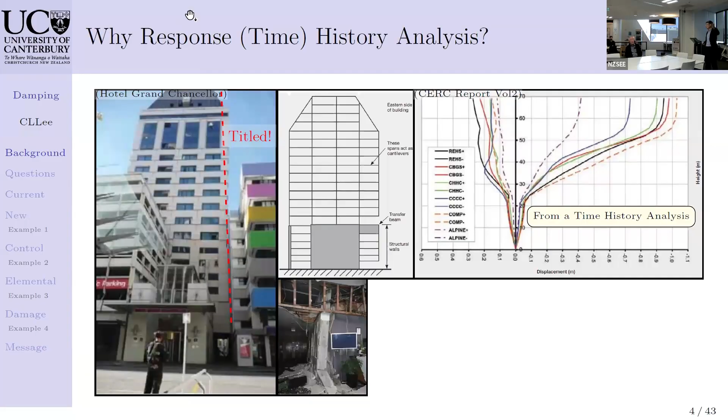Because this structure is actually non-symmetric, non-regular, this ratcheting effect cannot be easily captured by using a modal response spectrum analysis. That means a response history analysis is warranted, for evaluating the performance or capacity of the building.

So I hope with this example, I can give you sufficient reasons why we need to worry about time history analysis. I understand usually this is considered a time-consuming process in the design office. But there's another good example which Ethel has published in a recent paper in the bulletin of NZSEE. If you have dampers installed, again, modal response spectrum analysis is not applicable, because the modes can no longer be uncoupled. So that justifies the need for response history analysis, or sometimes called time history analysis.

I'm going to show you some equations, but I promise I only show two equations, and this is the first one. I believe most of you have seen it before. This is the equation of motion. We have three terms there that resist: you can treat them as inertial force, damping force, and the structure resisting force that's derived usually based on material hysteresis. The right side is the equivalent forces due to earthquakes.

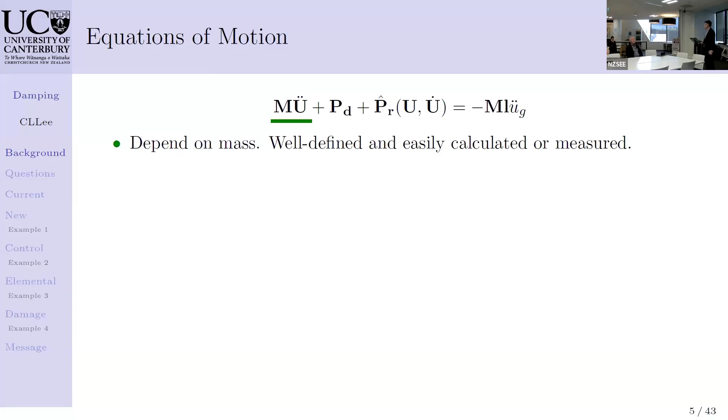So let's examine the first term, which is the inertial force. Inertial force, obviously, is a very intuitive term that basically says there's a mass, the mass accelerates, so they induce forces. That depends on mass, and we can always quantify them rather easily through measurements. We can roughly give an estimate on what would be the weight or mass in the buildings.

Of course, including all the non-structural components, we could have a good handle on it. The third term depends on the material properties. For nonlinear structures, we always see the stiffness changes with displacement. And usually it's well defined through lab measurements. We could measure the stress-strain relationship, or we can test something in the lab.

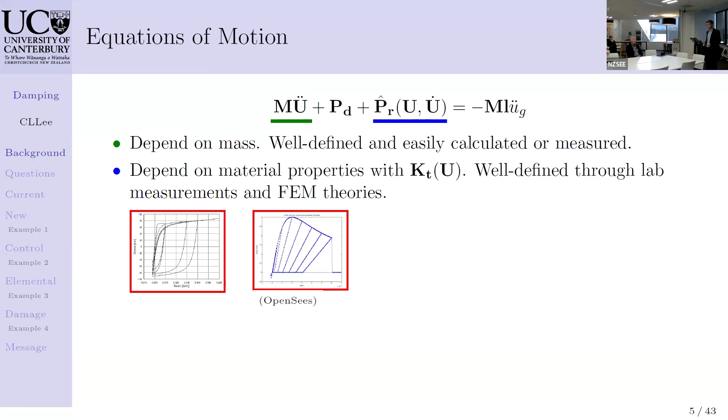We have a good handle on it. And based on FEM theory, the finite element methods theory, we could kind of set up a structural model for that. Say if we can set up a stress-strain curve of steel material, concrete material, based on FEM theory, we know roughly how we can approximate the columns, using different approximation theories, whether detailed solid finite elements or some kind of simplified concentrated plastic hinge element, or somewhere in between. It depends on the level of accuracy that you want to pursue, but definitely you have a good handle of it.

You have a damper. Let me remind you again, we have a damper. Damper actually belongs to this term. That's why you may notice that I said the third term is not k times u, but rather it's a function of u, but could be a function of velocity as well. The viscous damper, we know how to quantify that behavior, so we should actually model it explicitly. In that sense, we are not trying to approximate using any modal analysis. We have a good understanding about that. And then we can allow modal coupling. So no problem with that.

But how about the middle term, the damping force term? What is it for? How to quantify it?

Well, that's blocking the title, but if you can help me kind of hide that if possible. Don't worry about it if it's not possible.

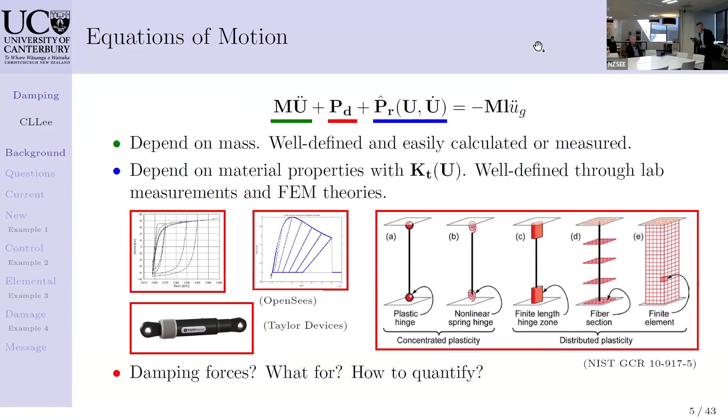It's okay. Don't worry about it.

So the damping force PD, we usually use it to model so-called unmodeled energy dissipation. What is it called unmodeled? That means for those energy dissipation in steel, concrete, timber, or any other quantified viscous damper, we could actually lump it into the PR term. But those that cannot be measured or quantified easily, we lump into this PD term. It's called unmodeled because this term is used in some documents by ATC and PEER. I kind of like it because it emphasizes that this is something you've missed in your material models. So you're trying to capture something you have missed.

So what are these kinds of energy dissipation mechanisms? It could come from micro-cracking and micro-yielding in structural members. We know that concrete always cracks - you always see some micro-cracks happening here and there. Even for steel, you also see some micro-yielding because of some inclusion or imperfection in the steel material. These are things we cannot easily quantify.

When we try to understand structures, we set up models, and we can't afford to have the exact nonlinear material stress-strain curve everywhere in the building. That is just too much. Think about a building with lots of material points - trying to capture every single inelastic thing is just too costly to do. So that means for some components, we see that inelastic deformation is going to be very little, so might as well just treat them as elastic. That's a kind of common practice.

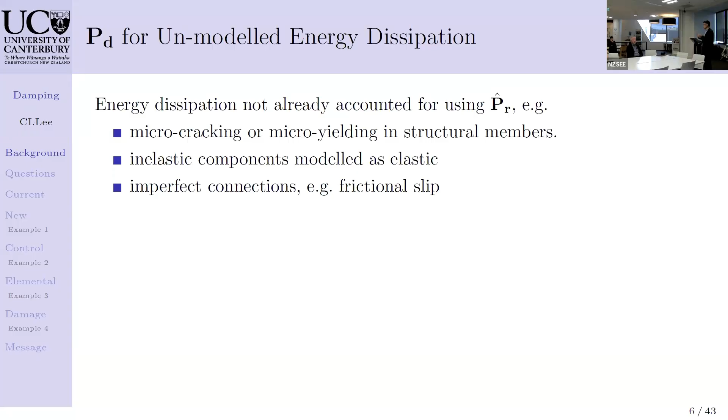Some imperfect connections - in theory, in our minds, they are perfect, and in our computer model they are also perfect. But we know nothing is perfect. All the connections that we have, sometimes you will see some slip happening, right? When you load it, because of insufficient turn of the nuts, it just could slip. So this could induce some energy dissipation as well.

And there's some interaction between structural components and non-structural components. Probably one of the major ones is that buildings never sit on a fixed base - they sit on ground, and ground could move. When any vibration happens from buildings, there will be some radiation damping between the foundation structure and the surrounding soil. Those damping effects could be quite significant. But usually in our practice, we try to model the structure as fixed base. In that sense, we miss that, and if we miss that, we have to account for it. How do we account for it? It could be in this PD term. Of course, not ideal, but there could be something there.

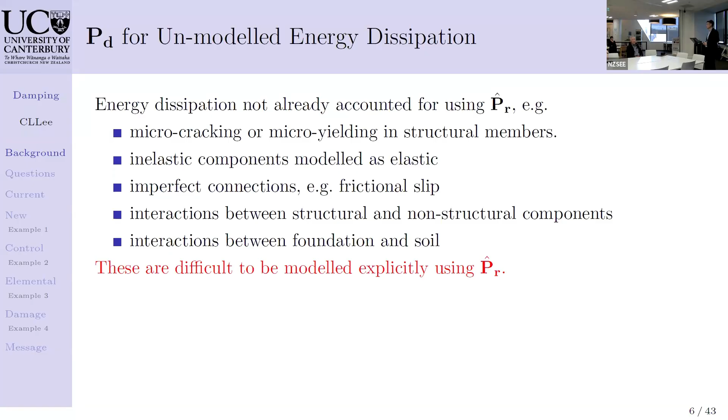These are difficult to be modeled explicitly using PR - that's why we use PD. So you might ask, since we want to model PD, how do we model it? I think the most intuitive one is viscous damping, right? Why viscous damping, which equals C matrix times velocity, U dot? Why is it that we like that? Because it's mathematically convenient and well understood.

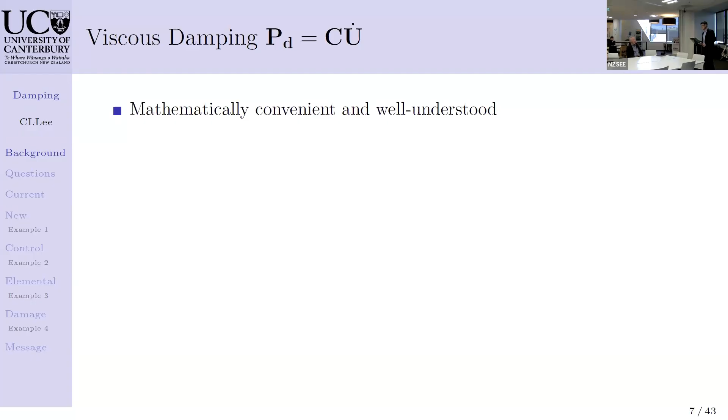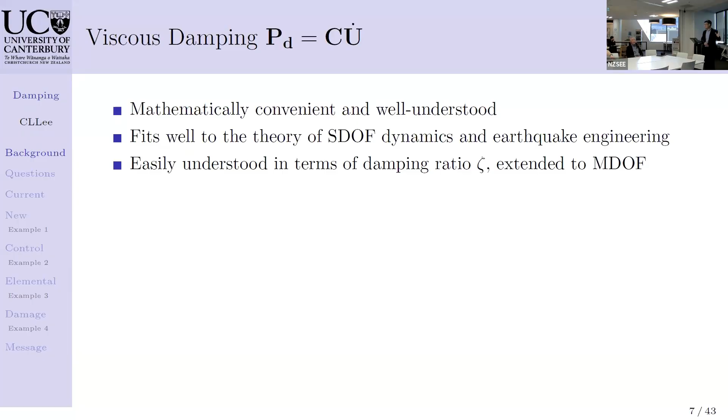Particularly when we learn about dynamics, we always start with a single degree of freedom system, and viscous damping is the one we learn. So it fits well with single degree of freedom dynamics. Also in earthquake engineering practice, we talk about damping all the time, so that's something we're familiar with. It's easily understood in terms of damping ratio, for one degree of freedom and the same for multiple degrees of freedom. We can talk about modal damping ratio - mode 1, mode 2, mode 3, mode 4 damping ratio. That's an easy way to quantify energy dissipation.

And recently, 30 years later, as people got more and more data, they also noticed that mode 1 damping sometimes depends on building height - the taller the building, probably the smaller the damping. I think it makes some sense because the soil part, the radiation damping part, could be less significant when the building is tall.

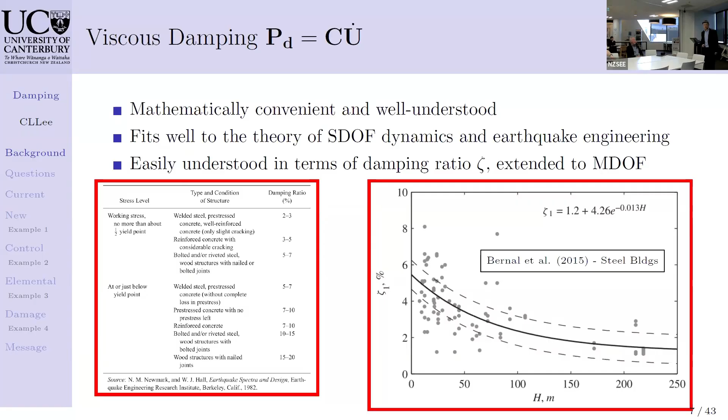Okay, now we understand that viscous damping is probably good enough, hopefully. And then now, as modelers, or as engineers, you might ask some questions. Let me think about what could be the question that we have in our mind.

The question for using the C matrix. So first question is, should we use a C that's proportional or non-proportional? And should modes be coupled? That's my first question. I hope some of you also have this question.

Second question: how do we assign damping ratio for all the modes? Now we know some data that gives us mode 1 damping ratio. But how about other modes? Do we assign the same damping ratio for all other modes or not?

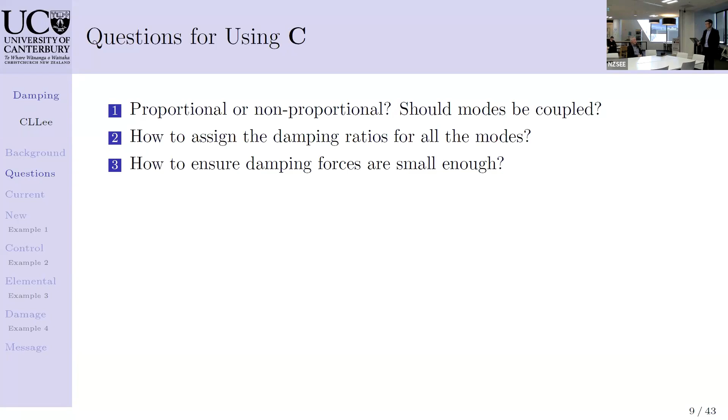And how do we ensure damping forces are small enough? I guess since Rayleigh's book on dynamics talks about, well, hopefully they are small. So we hope that all the major energy dissipation has been captured by the third term. That's why this second term, we hope, is small. Hopefully.

And if we have lots of degrees of freedom in structures, nowadays people like to model buildings with every single detail, 3-dimensional. So the number of degrees of freedom could be tens of thousands, nowadays you can afford that, or even millions, possible. So how can we ensure whatever C we use is fast enough to give me the solution? I can't sit there and wait for a year. I can afford to wait for one weekend, but not a year.

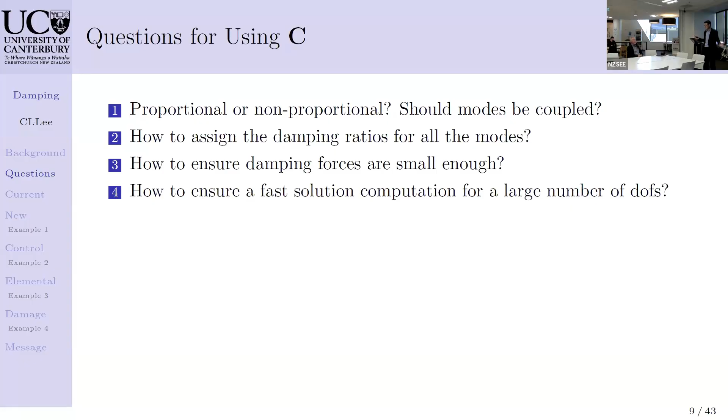And we know structures go into nonlinear range, the stiffness changes. Should we update C or not? If we don't update C, think about this second equation I'm going to show you: the damping ratio is equal to half of C divided by the square root of KT times M, where K is stiffness and M is mass. If the stiffness drops to, let's say, 1% of the initial, what will be the damping ratio if I don't change my C? It will be 10 times. If you originally assume 5% damping, it ends up 50% damping. Is it what you want?

And sometimes structures could go into a state of collapse. Maybe not collapse, but heavy P-delta effect leads to negative stiffness. How can I ensure that I have positive damping during softening response?

And we know structures are never homogeneous. We have structures of different parts. Some could be made of concrete, some could be made of steel. Probably for very tall buildings, people like to use hybrid structures, so there are concrete buildings in the lower floors and steel structures in the higher floors. And how about the foundation, or some basements? They have a lot of soils containing it. Is it right to assume the same damping throughout? But what if I don't want that? I just want to assign damping at different zones.

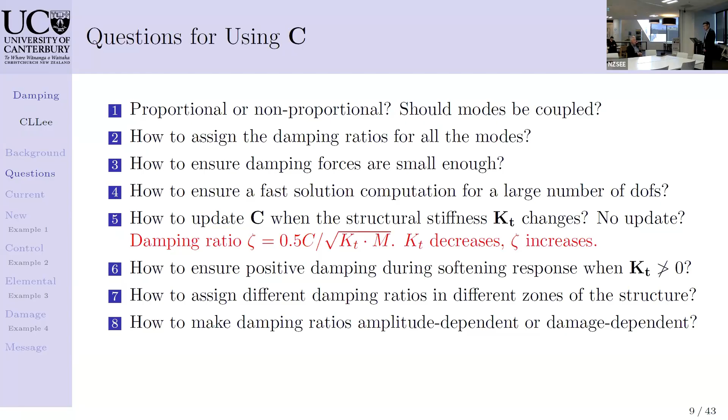And finally, I think this is the most important question from the users' perspective: can I get a C that I want? If I want to simulate the dynamic response of a structure, can I assign a C that I want in terms of damping ratio? In particular, sometimes we say 'I want,' but don't really mean I want — the code wants it, or some measured data requires that. How can I give a C that gives me that? Could I calibrate against measured data or calibrate against the code-required data?

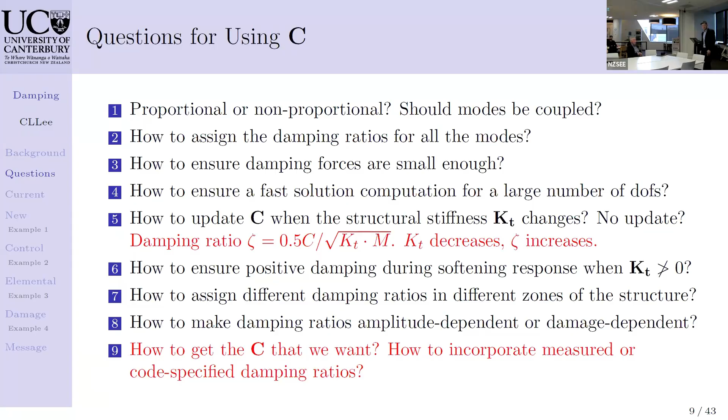So these are the questions that I have when I work on this. Let's see how — I hope that I can go through that slowly. Hope that question can stay with you a bit. So later in the following discussion is how I develop my model to address all these questions. I'm not saying that I could answer them fully, but at least I try to address them.

So before I address them using my model, let's look at the current practice. The current practice is definitely the Rayleigh damping. Why? Convenient — you can find it everywhere in the software, and for so many decades of development, this is well understood, Rayleigh damping. This is very convenient, particularly for uncoupling modes, because we just assume that modes are uncoupled, easy, no worry about how modes couple.

Another important factor is that C is sparse. Sparse means I don't have to store a lot of numbers, and when I compute for the solution, it's fast. Basically, it's a free answer—it's the same as computing the static response, just done multiple times for different time steps. I don't increase the cost, so it's fast.

Now let's see what's the consequence of this. Let me try to plot the damping ratio versus structural frequencies.

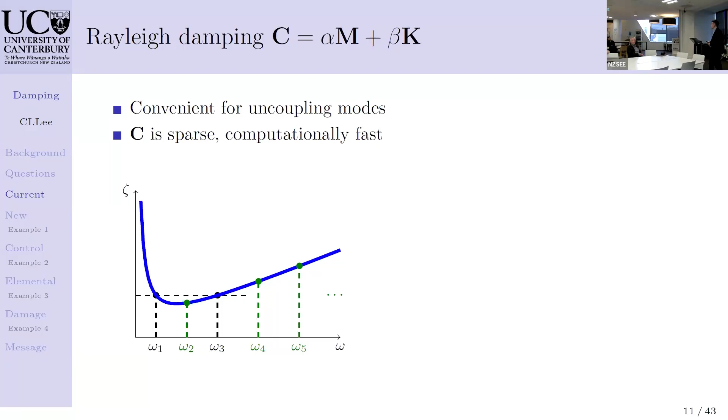For all the higher modes, is it possible? Very possible. Let's say you want to update your C based on tangent stiffness, but you don't change your coefficients—you keep them the same, just updating based on tangent stiffness, the so-called tangent proportional C. This is one of the common terms you probably hear people saying.

What happens? The damping ratio of all the new modes will just move along this curve. Notice mode 1—it could actually increase, by how much? If you don't check it, it's very dangerous. Particularly, if you don't check it, it could go to infinity if you have zero frequencies.

What happens to base isolated buildings? If you have base isolated buildings, you are imposing very high damping there. If you impose very high damping, you could become too optimistic about the performance of your base isolation.

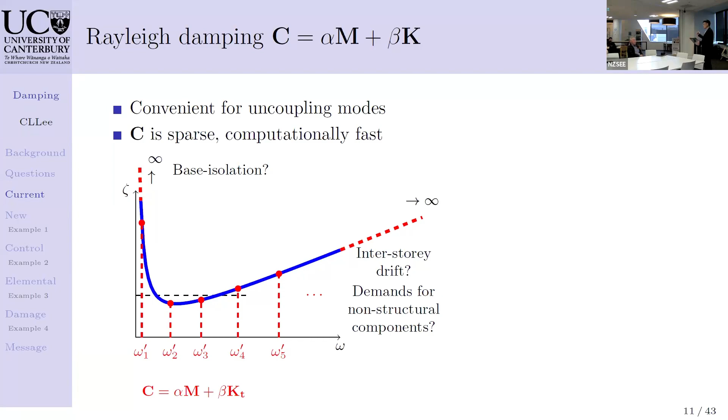How about this then? This could also go to infinity, right? What happens to interstory drift, which is often sensitive to high frequencies? How about demands on the non-structural components? People care about non-structural components—one of the big concerns in the Christchurch earthquake was lots of damage in the non-structural components, increasing the downtime of the buildings. So this could become another concern.

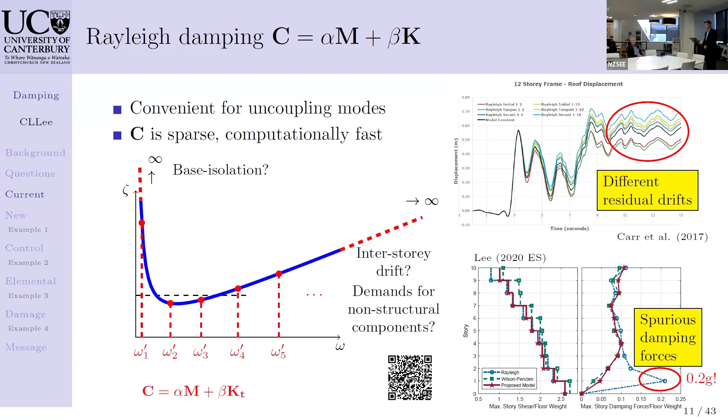Now we know there's some concern about Rayleigh damping. But what is wrong with that curve? Clearly it's because of this blue curve here.

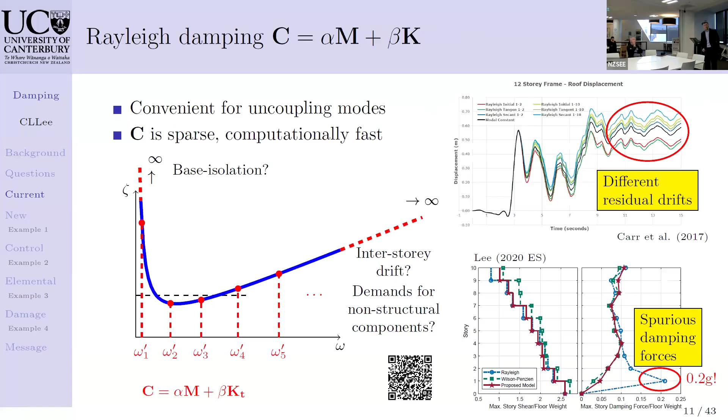That actually forces you to always have that curve if you use Rayleigh damping. But from data you measure, it's probably not like that. The codes may ask you to design a building based on, let's say, 5% damping, but it's not going to tell you it will be like that. Hopefully they'll say maybe 5% damping for all the modes, for example.

Some studies show an increasing damping ratio, but others show a lower damping ratio in higher modes. I have a student working on testing steel buildings, scaled down on the shake table, measuring data. Somehow the damping ratio of mode 2 is smaller than mode 1. So there's no good reason to say that damping ratio has to follow that kind of curve.

I think when there's a lack of information, a uniform distribution of damping ratio is probably reasonable. At least people could accept that until we have more information.

And there's no reason to believe a high damping force for resisting rigid body modes. Think about base isolated buildings. Why should we believe that there's a huge damping force resisting it? There's no good reason to believe it. We're not talking about strong viscous force coming from nearby fluid, unless you're talking about offshore structures.

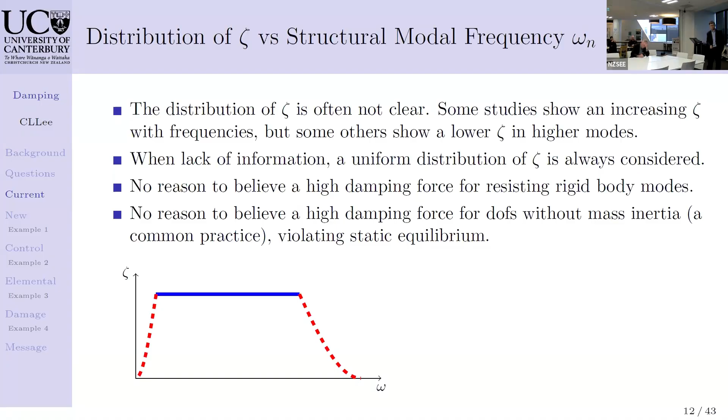So I think a good model should be able to give you this uniform damping, and hopefully it could tie down to zero at zero frequency, rigid body modes, or at high frequencies. Hopefully it doesn't give you huge damping force and pollute your result for interstory drift. This one is not good.

Okay, are there any other options? Let's say Rayleigh is not good, right? We know Rayleigh is not good. Any other options? There are two classical options.

One is called Caughey damping. The other is called Wilson-Penzien modal damping. I think it's commonly known as modal damping, but I want to give credit to Wilson and Penzien. That's why I always call it Wilson-Penzien modal damping. But you know they are the same thing.

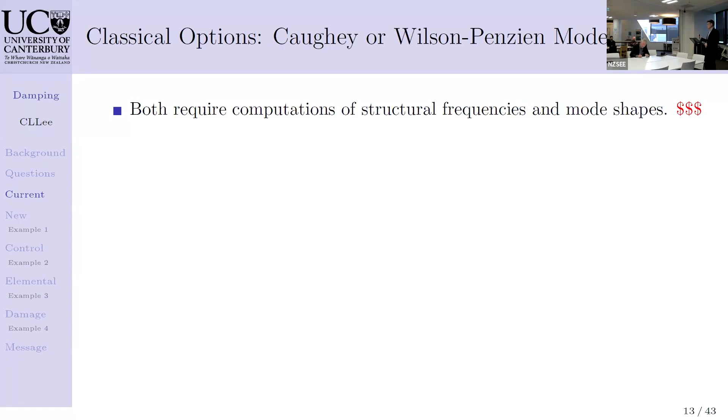So the question for these two models is that they all require computation of structural frequencies and mode shapes, particularly structural frequencies. Computing them is not cheap computationally. If you have very small structures, yeah, fine. But if you have very large scale structures, no. If you compute it once before the analysis, okay. But if you do it at every single time step, no way, no one would want to do it. So you can't update C basically using this option.

Second, as I said, C cannot be easily updated when KT changes, when tangent stiffness changes, because there's no time for it. So a large increase in zeta if you don't update. That's the consequence you have to face.

Caughey is even worse. It's not going to give you very good uniform damping. Some, if you are not careful enough, it could give you negative damping. That's clearly not what you want. You want the energy to be dissipated, not gaining energy.

Wilson-Penzien modal damping, you may select the first few modes, if no one can afford to compute for all the modes, maybe first few modes, could be up to certain numbers. But then you need a beta K, another tangent stiffness term, to avoid undamped higher modes. Later I will show you when there are undamped higher modes, what will happen.

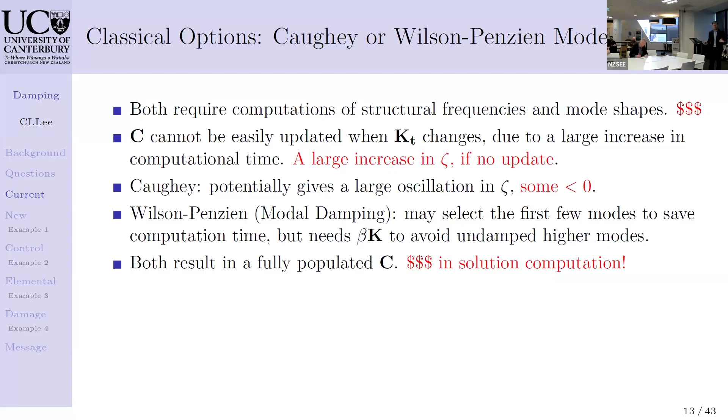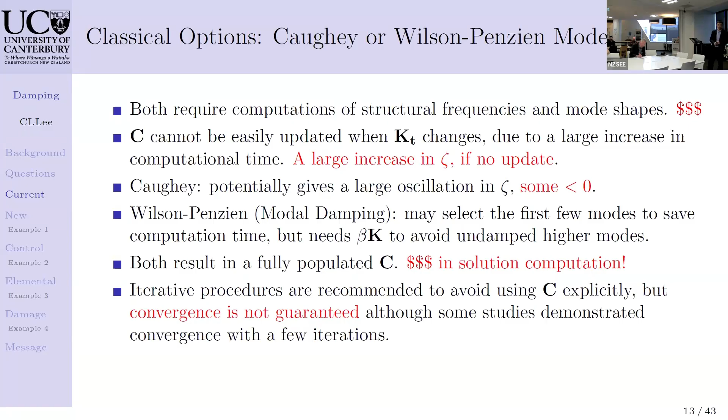So they both result in a fully populated C, so the computation is going to be huge. Of course, I know, since I know it's here, we do have some iterative procedures to do that, to avoid using C explicitly. But I want to say convergence is not guaranteed, although some studies demonstrated convergence with a few iterations.

Okay, so these are the current practices, which I think are not good. Definitely not Caughey modal damping. Maybe I know people start using that, but I do think that if you don't update it, you are going to end up with high damping. If you update it, sorry, you can't - it's just too expensive to do so.

So I thought about an idea. Remember that curve that I showed you, that Rayleigh curve, terrible. Clearly, obviously, the easy way to fix it is to flip the curve. So to flip it, I basically take that Rayleigh curve and flip it upside down. Then I can get zero damping at zero frequencies and zero damping for infinite frequencies. And in between, I get a very nice bell shape, but on a log scale, not on a linear scale, on a log scale.

Nice, right? This is a nice curve, very smooth, positive throughout, easy to control. We can control the location of the peak. We can scale the value of the peak, up and down.

Now this gives me a good bell-shaped damping ratio versus frequency. Obviously you say, well, I want a uniform one. Well, you can add more. If you have two bell shapes, you can sum them up and get this curve. Three bell shapes, you get this curve.

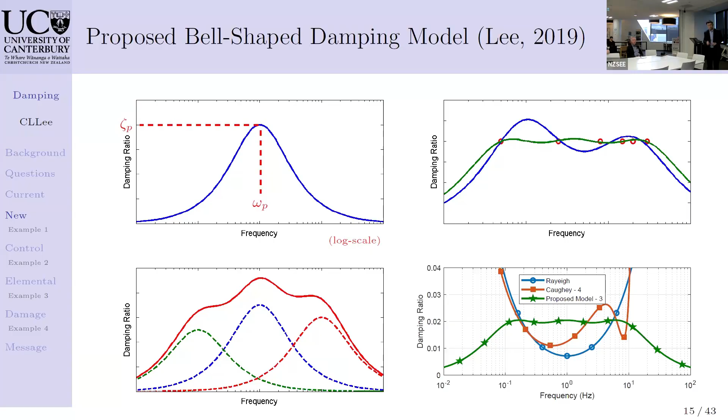So then let's talk about computational efficiency. Granted, the C matrix using this bell shape will still be fully populated. But we don't have to implement it as a fully populated C. We can find a way to expand it to make it completely sparse.

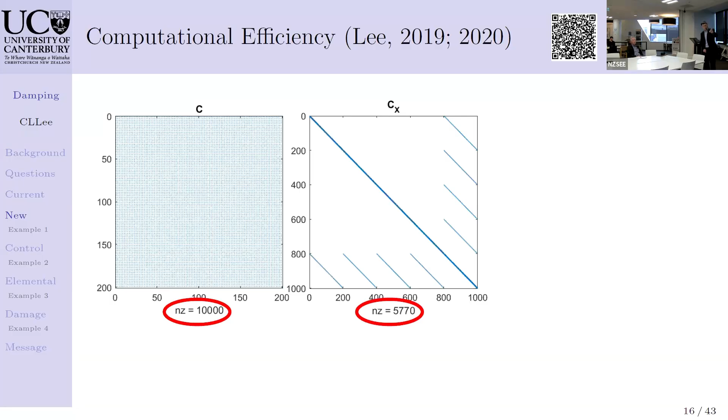And now, actually, I'm also continuing to work and improve this, which I won't talk about again, but I've made it even better these days. It could run even faster and without worrying about sparse matrix storage.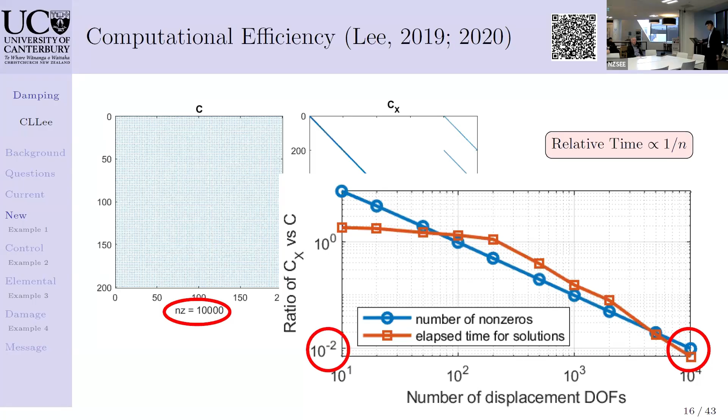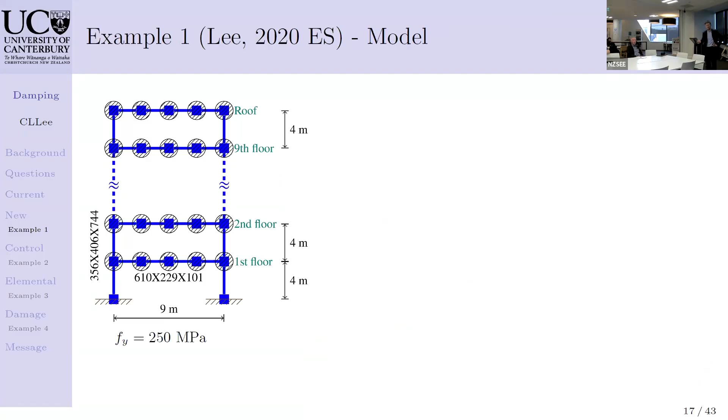Okay, let's do an example. Enough said, let's look at an example. So here we have a 10-story steel building, with a yield strength of 250 megapascal. And I try to consider 3 options for damping: Rayleigh, Wilson-Penzien model damping, and the bell-shaped model.

And I select the first 6 modes to ensure about 5% damping. The first 6 modes give me, I think, 90% of the participation mass. So I choose these 6. And let's say I choose to match only 2 modes, the first 2 modes, for Rayleigh. And then for Penzien model damping, I match these 6 modes, and all other modes are just undamped. Okay, and then I have this, my damping.

And when I work on that, I say, well, let's say C is not updated. I make it constant, so it's called initial stiffness proportional. So C is constant throughout the whole time. It doesn't matter whether the structure has yielded or not. I subject this to these ground motions.

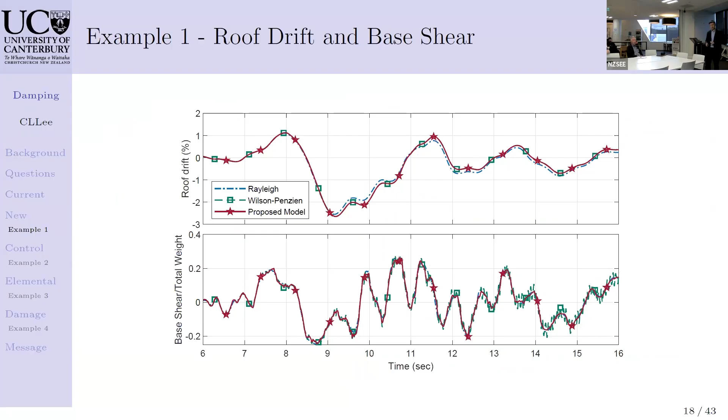The PGA is about 1G. And then this plot shows the result of the roof drift for the top graph and the base shear for the bottom graph. The top graph has 3 curves coming from Rayleigh, Wilson-Penzien model, and the proposed bell-shaped model. You'll see that the displacement looks okay, they are kind of similar. There may be only some deviation in Rayleigh's one.

I think the reason why we have a small deviation is because they all have the same lower mode damping ratios, and I keep C constant. Later I have more examples which I will show you, where the deviation in drift could be significant, which Edoka has also shown before, but not in this example.

But I want to highlight the base shear part. Now, the Wilson-Penzien model damping gives undamped higher modes, so you would see zigzagging in the response. This comes from the higher modes. That's why it shows you the importance of damping them out.

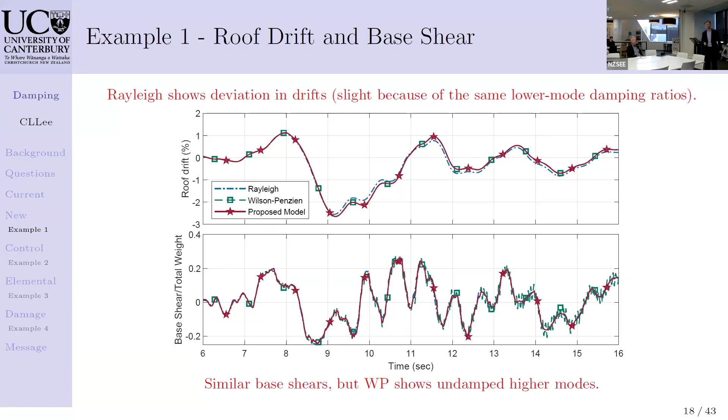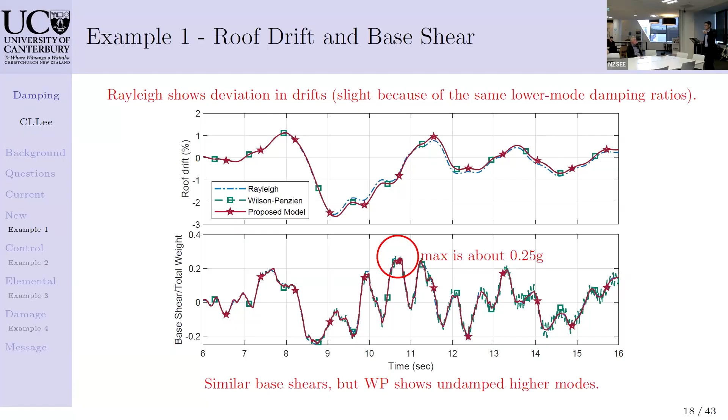You might wonder, well, maybe it's not a big deal, right? It looks small, it's okay, we're happy with it. But this is the global response - let's look at the local response. Before I go to local response, let me remind you, the maximum base shear is about 0.25 G. Remember this number? Later I'm going to show you something strange compared to this number.

So this plot shows the story shear and the damping forces exerted on different floors. Look at the left graph where it shows the story shear. Obviously, Wilson-Penzien will give you a higher story shear. It's because of undamped higher modes, and those undamped higher modes give you a larger value.

They may be small at the lower floors, but the difference is significant on the higher floors. Later I can show another example where actually the significant difference could be on the lower floors.

Remember that number, 0.25 G for the maximum base shear. Look at this one, 0.2 G. You see the damping force? The floor damping force is 0.2 G, 80% of the maximum base shear. This is no kidding. This is a huge number.

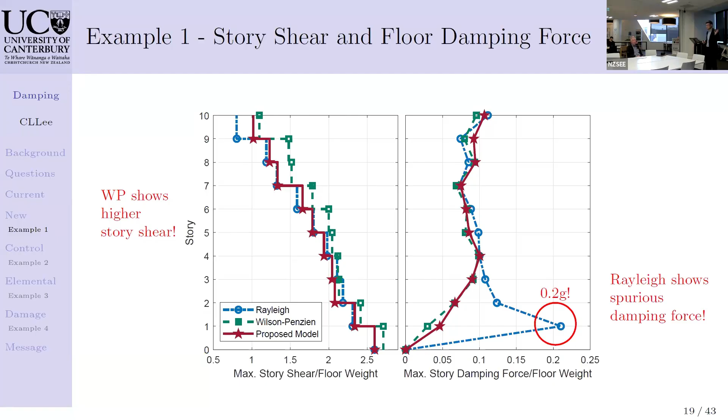Using the bell-shaped model, it doesn't give you that, even if I keep C unchanged. I have a higher damping ratio, but I don't have this kind of strange things going on.

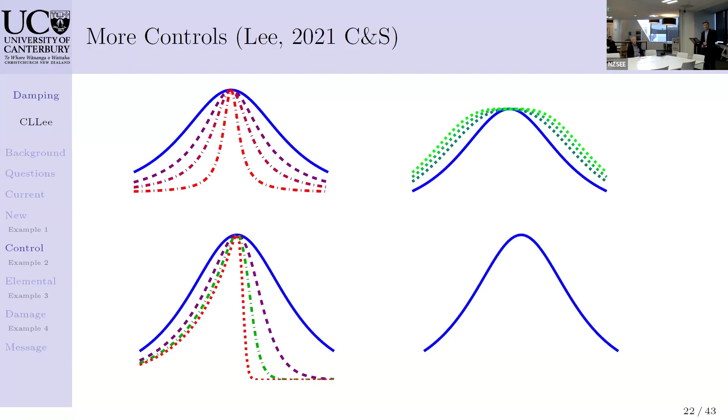So I show the flexibility of the bell shape to give you all kinds of curves you like. Not only do I have two parameters to control the location of the peak, I can also control the width of the bell shape. I can make it narrower, or I can make it wider, with some additional parameters to control them. Or I don't have to keep them symmetric - I could control it such that I have a larger drop on the right side or on the left side.

Of course, then you ask, what's the consequence? Well, you have to have a longer computational time for this. That's the downside, but it's really up to you. So no free lunch - whatever additional flexibility you like, you have to pay more for it.

But you say, remember I said the structure could go into a collapse state, it could experience negative stiffness - then would I have positive damping? Let's look at the Rayleigh case. In recent discussion, a lot of people suggest forgetting about the mass term. They say the mass term is not real because it kind of suggests some kind of air friction, so the mass term must be removed. Fine.

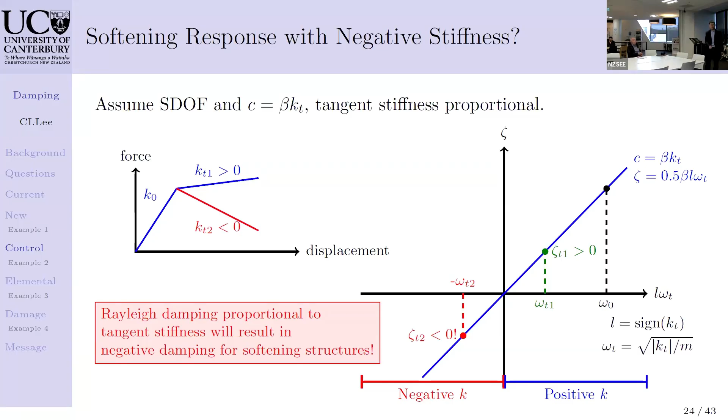So the bell shape that I have can be extended to negative stiffness region. So this one, I have two graphs. On the right graph, you see the damping ratio versus frequency associated to positive stiffness. I can also control the one associated with the negative stiffness, that's where you see negative frequencies. Now I can control that to have the same damping ratio, let's say 5% here.

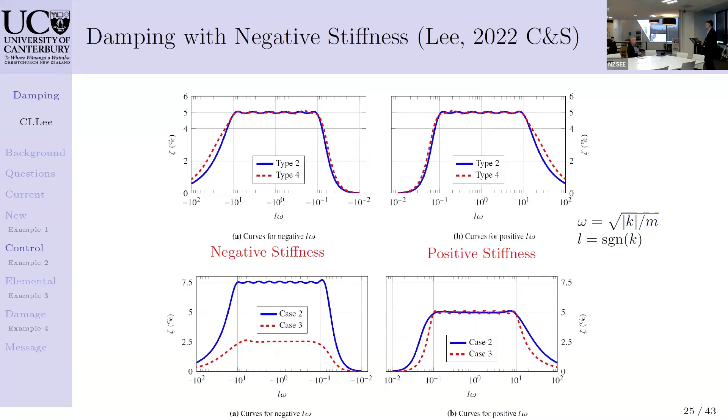Don't worry about type 2 and type 4, it's just different types. If you're interested, there's a QR code, you can check out the paper. I don't have to force myself to have the same damping, I can adjust them. I can have a higher damping or lower damping when the structure is experiencing softening ratios.

Okay, fine. You say that's cool to have, but does it really matter? So I'm going to show you something.

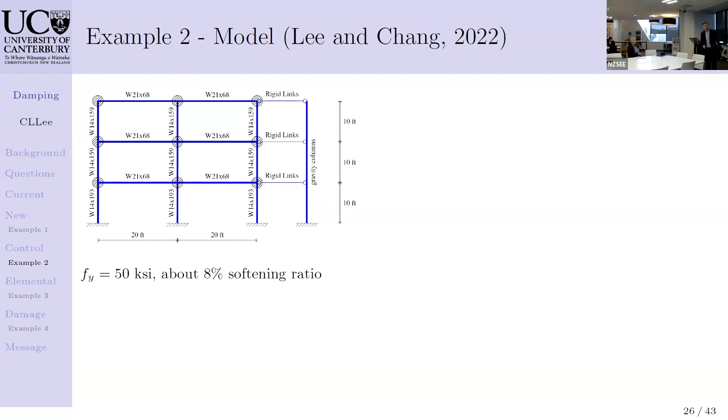So this is another numerical example that I've done. Now I've used imperial units, so the yield strength is 50 KSI, and the columns have an 8% softening ratio. So it's not really significant, 8% only. But because of P-delta, this kind of thing could actually complicate the problem a bit.

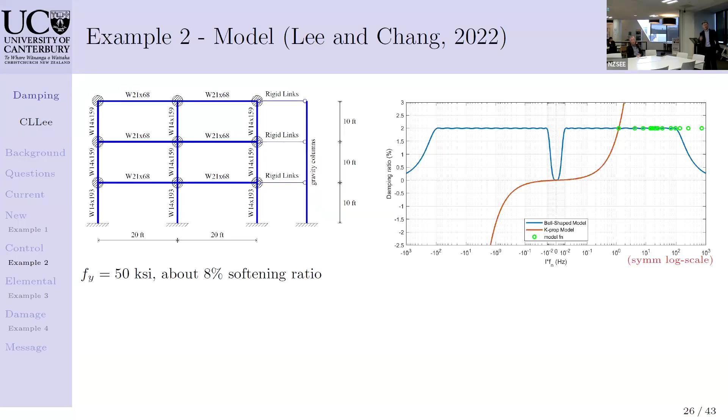And remember, this is a log scale, so the blue one shows the bell-shaped damping ratios, but the red one shows the one coming from the stiffness proportional damping. For simplicity, I just ignore the mass term for now, I just keep this one. It looks a bit odd, like a linear line, because this is a log scale.

So that's for positive, that's for negative. And then I ensure my C is proportional to the tangent stiffness, so that means the damping ratio is going to move on the curve. So subject it to the north-south components.

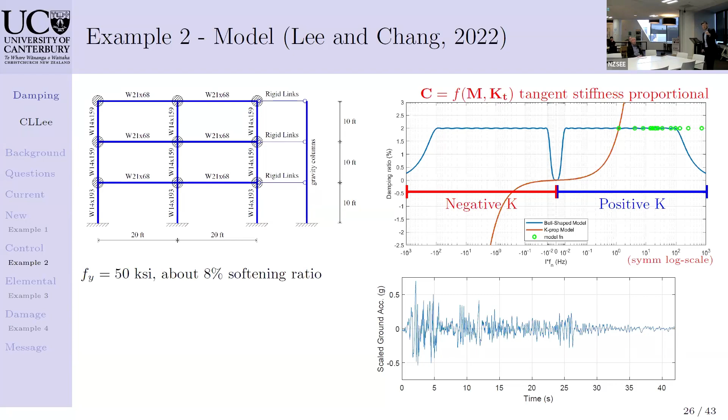And you might wonder, why did the Rayleigh give lower drift? Because remember, you go back to that curve again - the damping ratios using the K proportional is much higher, right? And those green circles are the initial elastic frequencies, right?

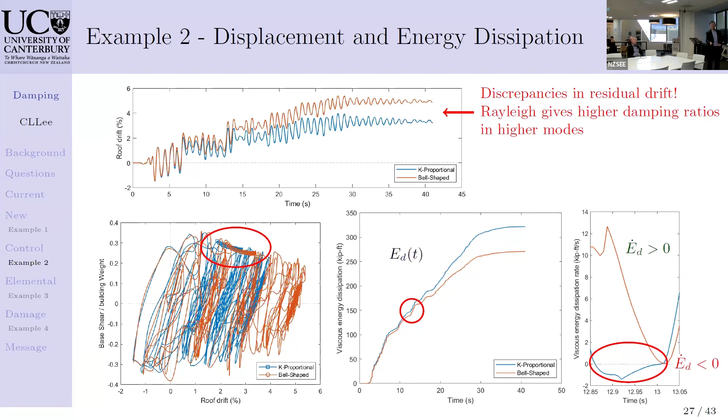Now, the next question I have is, well, the structure is never homogeneous, right? I have concrete structures, steel structures, timber structure mixed together. Can they have different damping?

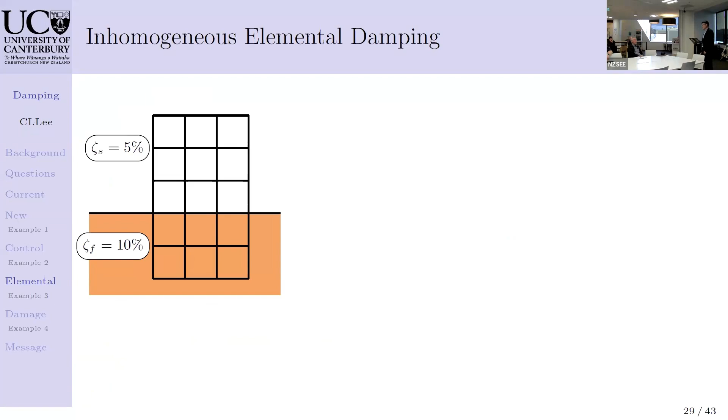Well, classical models are designed for global damping, not for this type. People say, oh yeah, let's form the C's separately and then assemble them. You will see that in a lot of textbooks saying that. And I would say it will not work, unfortunately.

Based on my experience, it will not work. It may work if you use Rayleigh, but only when you use Rayleigh. But Rayleigh is not uniform then. So when you say 5%, what do you mean by 5%? 5% for which mode? So they don't necessarily work.

And of course this idea also gives rise to, I guess, the elemental damping sharing the same idea. Can I form elemental damping in different parts and then assemble it like that? Well, I've done some study and used that idea, and ensured my global damping is 5%

If this is your intention, so be it. But I guess I doubt this is your intention. You probably don't want to see thousands or tens of thousands of damping values on the higher modes.

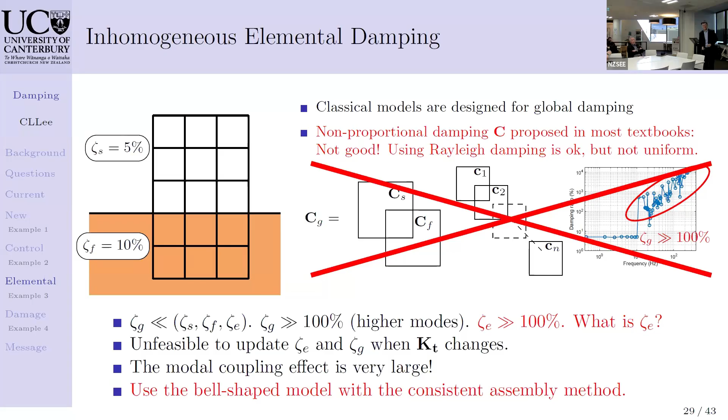So let's use an example to illustrate that. Here we have 8-story buildings. I'm going to say 5% for the floors. A lot of mass there, probably makes sense. For the columns, I'm going to play with different things, 5% and 1%.

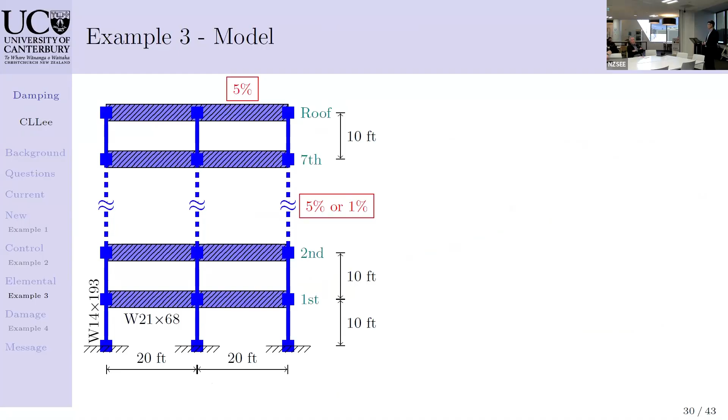So what happened? If you use the bell shape with a consistent assembly method, if you have 5% everywhere, the global damping also is 5% everywhere for all the modes. Definitely consistent, right? You assign 5% to all the elements, you hope their global structure also exhibits 5%, and I can ensure that.

If I have 1% for the columns, then I have a weighted average. Right? Weighted average. That makes sense, right? 1 and 5 average is 3. Hopefully, based on the number of elements, columns, beams, roughly equal numbers between columns and beams, so you probably think that if I have more columns, it'll be less; more beams, less columns, it'll be more, right? Towards 5%.

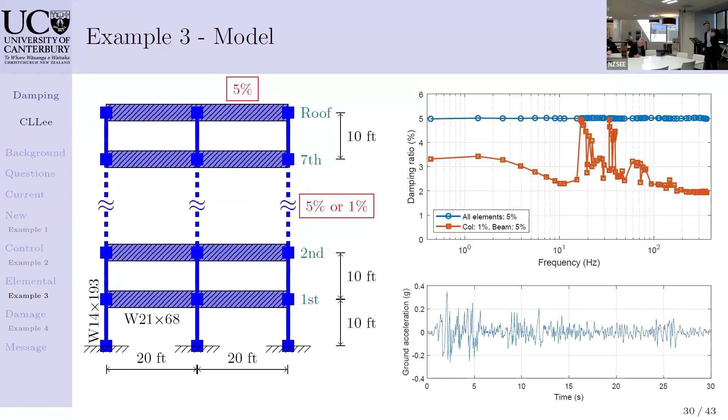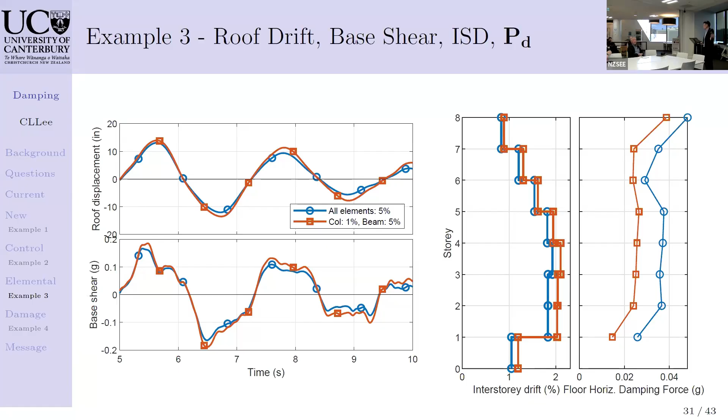Finally, okay, let's say I'm happy with that. But how about damping is not constant? I can change it, right? My student here says damping could be amplitude dependent. Right? How do we handle that? Okay, we say when a building is damaged, its stiffness K changes, and the damping C also changes accordingly.

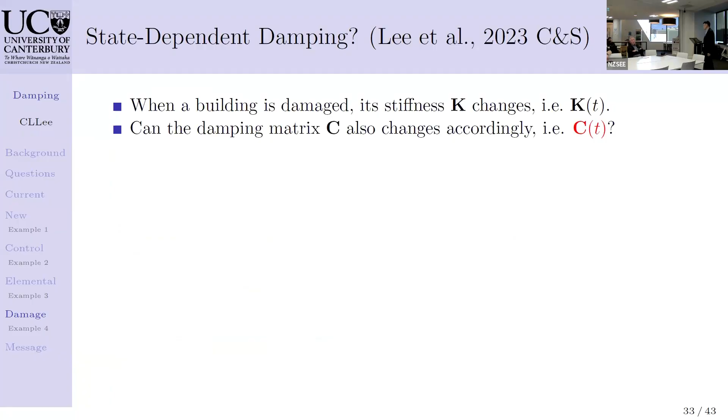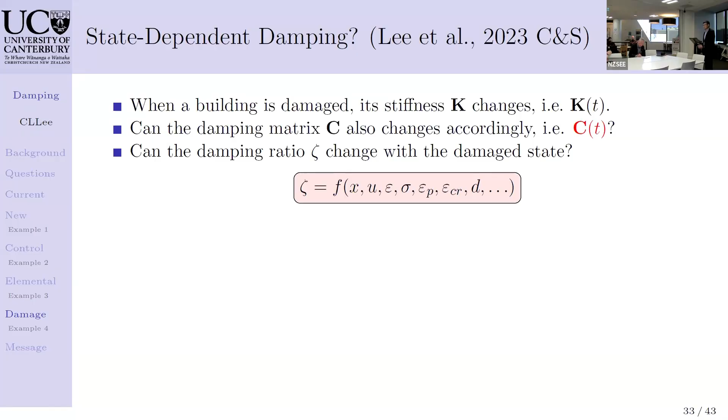Well, in particular, I guess in your mind probably you don't know what C means - you can't measure C. So what's actually in your mind is damping ratio. How could damping ratio change with damage state? Or in particular, can we say damping ratio is a function of position, of displacement, of strain, of stress, plastic strain, fracture strain, damage, or whatever parameter you like to quantify the state of the material, beams, columns, components, substructure - right? Can I do that?

Let's say for nonlinear material, okay, it goes through this hysteresis - I only draw the first quadrant, right. As the stiffness changes, can I assign different damping ratios at different paths? Well, if we want this, okay, it doesn't have to be stress-strain, it could be force-displacement. Some components, phenomenological elements type, would be plastic hinge elements - more simpler rather than stress-strain. No one can afford the fiber section modeling.

And let's say this we can do - can a change in material damping be reflected on the global damping? Can we do that, right? If it is, and it can be simulated numerically, which is what I hope so, it can give a better calibration power for simulating inelastic structural response. Okay? I'm not emphasizing accuracy, I'm emphasizing that it gives you the power for calibration.

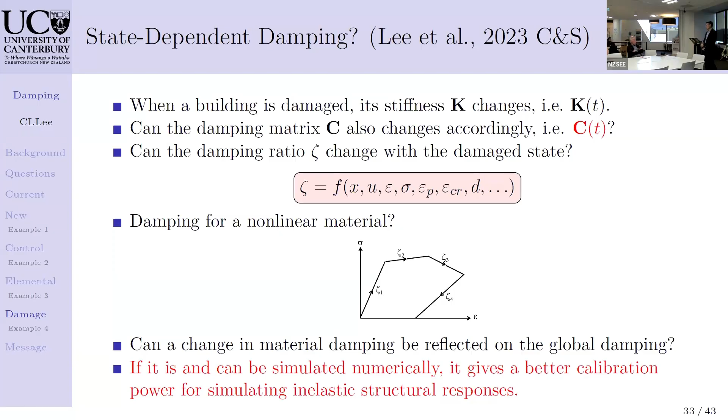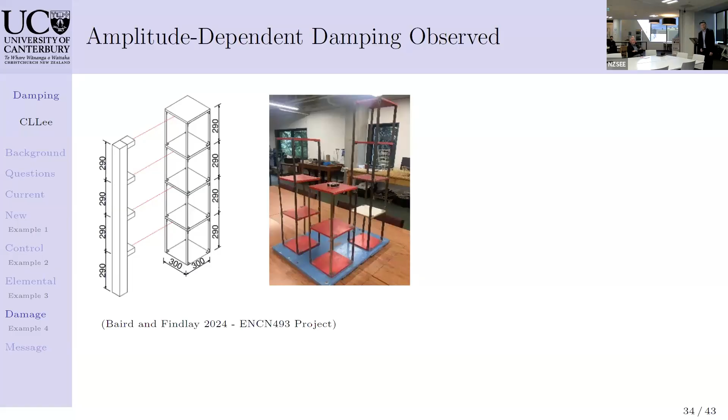And then they notice the damping ratio does change with the drift amplitude. Okay, the amplitude starts from 3%, then dissipates all the way to 0, and they also notice the damping ratio also drops. Of course, you could say, well, this structure is small. Granted. But I guess in real buildings, probably similar, right? Well, I don't know, but at least this one exhibits that phenomenon - the real structure probably exhibits it too.

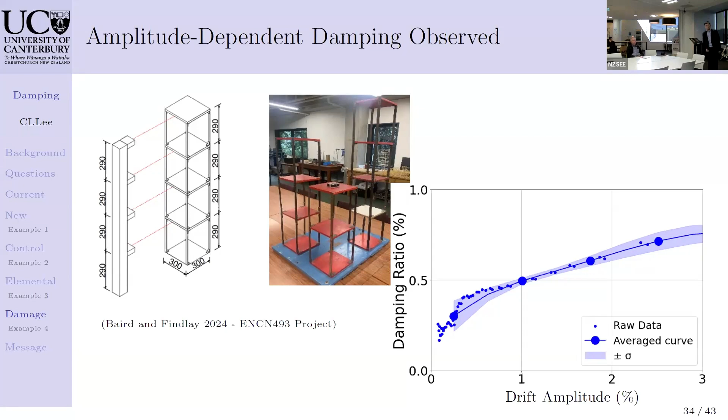Now this raises the question that damping ratio is not constant. Now I play with this idea. I use the model by Professor John Hall in 2006, a 10-story shear type building.

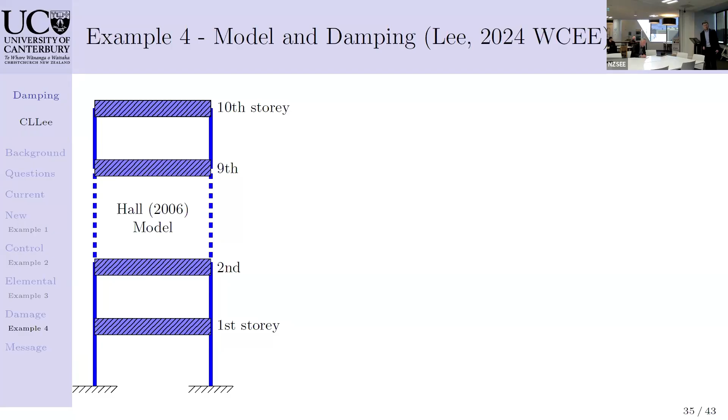So there are only 10 degrees of freedom. It's a shear type, and in each column there's different stiffness from story to story, but they always have the same yield displacement, I think about 1.1 cm. And then when it yields, the hardening ratio is always 3% of the initial stiffness - so 3% hardening.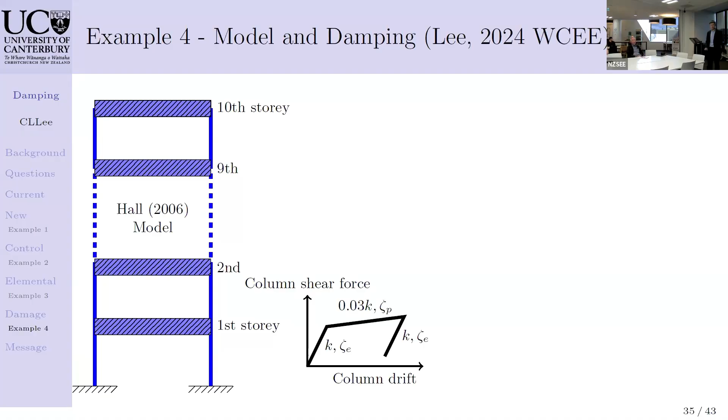I consider three options to model this. First, I use a Rayleigh damping model, made initial stiffness proportional. Second, I use Rayleigh but make it proportional to tangent stiffness. Third, I use the bell-shaped model. But the bell-shaped model has three sub-options.

The first option is that I say, I don't care what the stiffness of the columns, I'm going to assign 5% throughout. So during the initial elastic stage, 5%, and in the plastic state, also 5%.

The second sub-option: initially 5%, but plastic state is 20%. You might wonder why 20% is such a huge number. Because the model I developed allows you to assign damping ratio to mass and stiffness separately. So since I only assign to the stiffness, not to mass, the mass damping stays constant. So the effect of this 20% won't show as 20%—it will actually show as 10%, because part of it goes to the mass, and mass damping doesn't change.

The third sub-option is that I make it 45%, even more drastic. This will actually lead to 15% in the global damping, but I'll make that clear later. Again, I subject this to these ground motions.

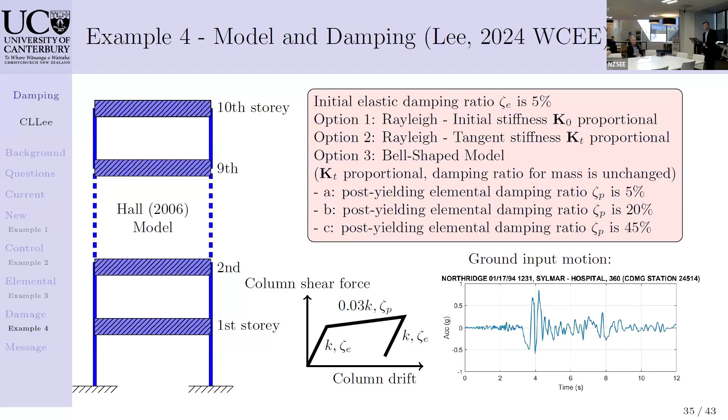Let me explain before we analyze the results, showing what it really means by how the damping ratio actually changed. I plot the Rayleigh curve here, but remember I use a log scale, so it looks like an upward concave curve. This is matched based on the recommendation by Professor John Hall. The first mode is about 5%, the second mode slightly higher, but all other modes were very high, going up to 20%.

If I have a case where all the columns yield, story to story, what would be my damping ratio? Obviously the frequency would drop and the damping ratio would increase. Look at mode 1—don't think this is unusual, because some of this mode was designed so it could happen, and should happen; I'll show you that later. Now the first mode becomes nearly 20%. That's for option 2, tangent stiffness proportional.

Then you ask, how about option 1? Option 1 would basically give you 3% damped stiffness. That means if you do the calculations, the damping ratio for all modes would increase by 5.8 times. So the 5% would become roughly 30%. But the higher modes would become even higher.

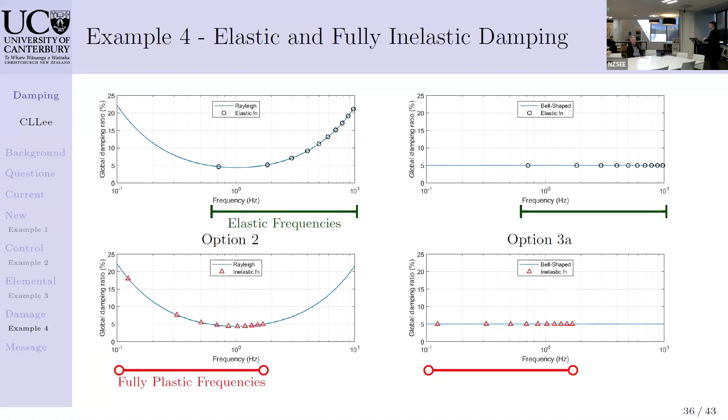Here, look at using the bell-shaped one. Now I use the green bar to indicate the range of elastic frequencies—I'm not going to label them again, you remember it. The green lines are for the elastic frequency range, and the red line with open circles is for the plastic frequency range. Using model option 3A, always 5% throughout, so when all the columns yield, it's still 5%.

Let's run the analysis and examine the damping ratio history. From time step to time step, I extract the C matrix and compute the modal damping ratio based on that C. You convert to modal space, extract all the diagonals, and compute what damping ratio would be experienced by the system. So for option 1, remember I said...

Look at the case when there's a range of plastic frequencies—and it did happen, or there's a time when all columns yield. The damping ratio experienced by the structure could be way more than 100% in the higher modes, because you don't update your C—it's initial stiffness proportional. Option 2 just oscillates on that curve.

About mine, using the bell shape—3A, 3B, 3C. 3A shows 5% throughout. 3B, when yielding happens, you'll see higher damping ratio, giving you 10%, and could give 15% or even higher in case 3C, when you assign 45% to the column damping ratio.

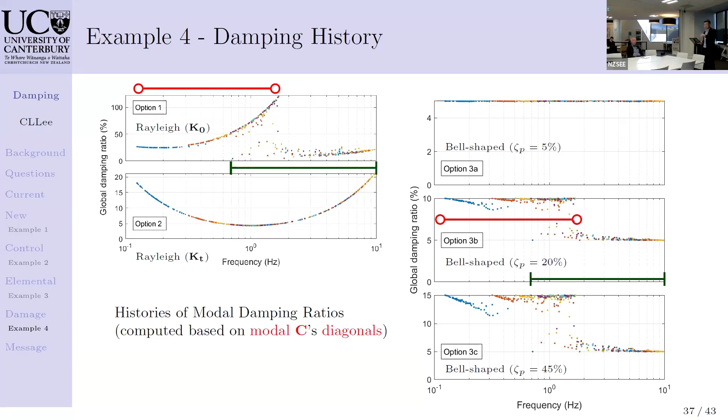Now look at the results in a global sense. Now that you know the history, let's see how they actually show up in the global response, how they affect it. The first shows the roof drift. The second shows the base shear, normalized by the yield base shear—so whenever the number exceeds 1, you see yielding. Then look at the total damping force collected at the base—you sum all the damping force at each floor compared at the base. So basically this is resisting the base shear.

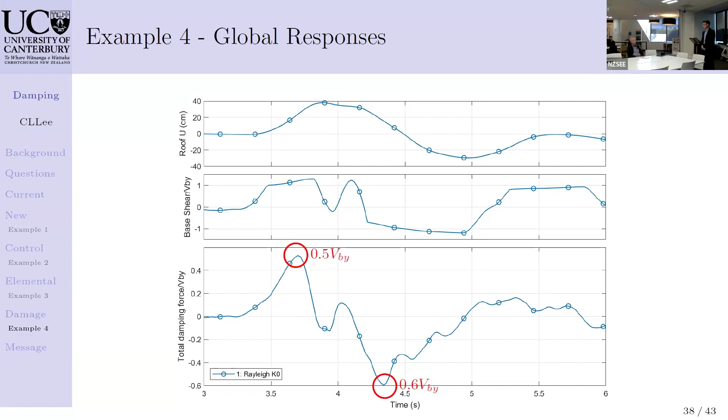If you use Rayleigh with initial stiffness, look at the number: 0.5 or 0.6 times the yield base shear, VBY. 60%—the damping force could resist up to 60% of the yield base shear. This is huge. Do you believe it? I don't know whether I can believe it, right?

And obviously, where did they happen? They happen when yielding happens. Whenever yielding happens, Rayleigh will give you very high damping. But you say, okay, granted, I'm going to try with the Rayleigh with tangent stiffness proportional.

Now, good. You definitely reduce the damping force from 0.6 down to about 0.2 or 0.25, right? And then look at the drift. Now you end up with different drift, right? Obviously.

And if you use mine, I can reduce it even further because I have even lower damping, right? 5% throughout, so we can have it even lower. Only 0.1 on the plus side. The negative side, yeah, about 0.1.

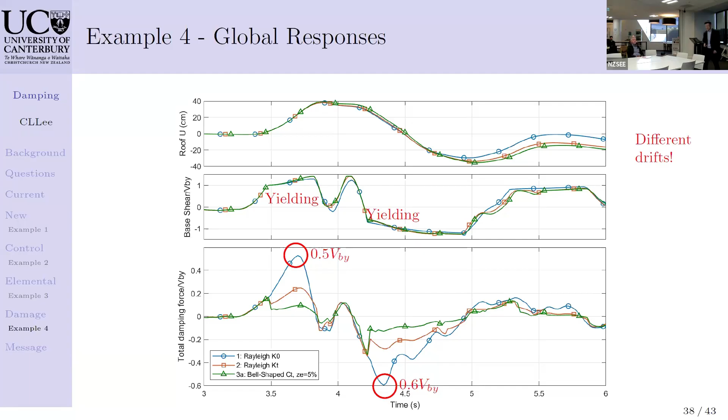Okay, and that seems in the spirit of Professor Hall, damping force is small enough. Hopefully, right? They are small enough. And you control them to be small. But if you think that they are not small, I say, I want it larger. I make it, as I said, you try with assign higher damping to the plastic state. Now you can have a higher damping force and reduce the drift a bit. Or even higher, well, it's up to you. So this gives you some freedom to control the damping force you exert on the system, and then the drift

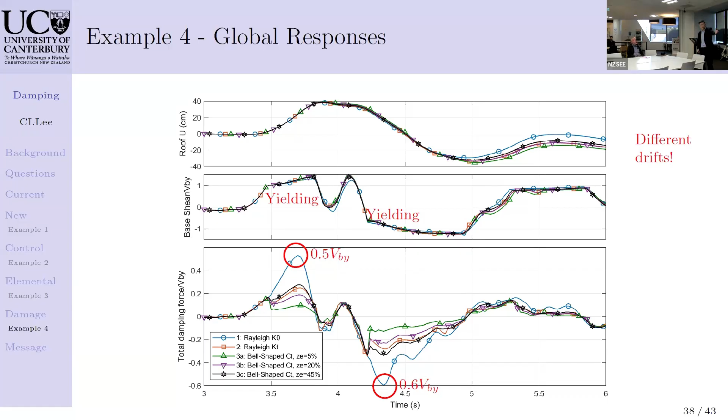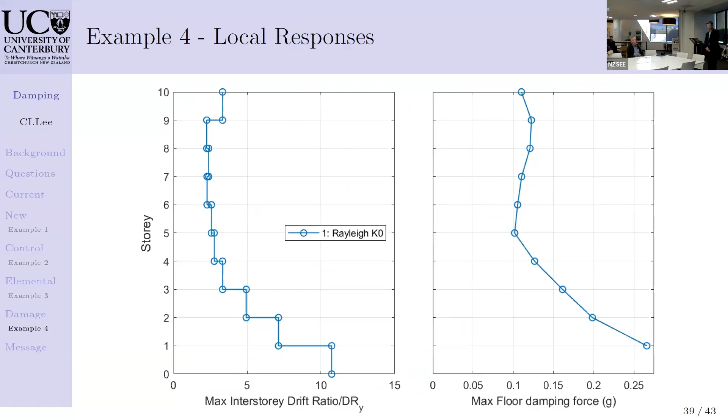will be different. Not only global one, let's look at local one. So the left plot is the interstory drift ratio, normalized by the yield drift ratio, and the right one plots the floor damping force.

Look at this one. Is it what you want? 0.2 to 0.25 G? Do you believe it? I probably don't. But I say I'm going to use Rayleigh with tangent stiffness proportional. Now I get a larger drift, right? Larger interstory drift. Now you can see there's a huge difference at the base.

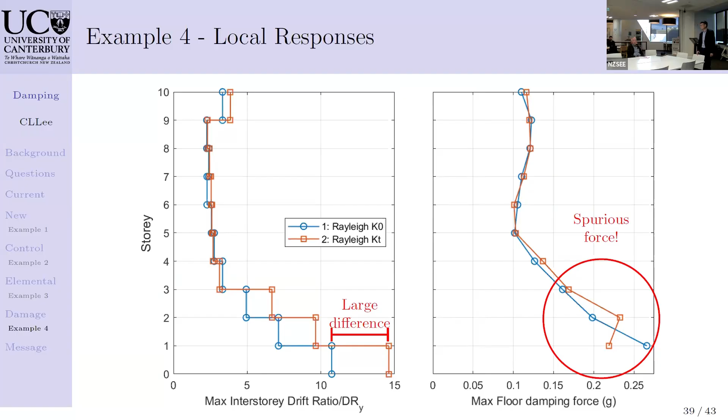But also the damping force, they still remain like 0.2, 0.25 G. So even though you kind of relax and have a high interstory drift, look at the damping force there, it could still be high. And is that what you believe? I don't know, but I probably don't. So I want to control it.

So if I use a bell shape, now I can reduce it. The damping force now reduced to about 0.1 G. And because I use 5% damping, 0.1 G, now I still have a similar interstory drift at the base compared to the Rayleigh tangent case, right?

So I can control the drift a bit, but at least my damping force is not strange. Of course, you think that maybe the drift should be smaller. I add a bit more damping. Yeah, I can have a smaller drift or even smaller. But the damping force, the maximum floor damping force, is controlled at 0.1 G, right?

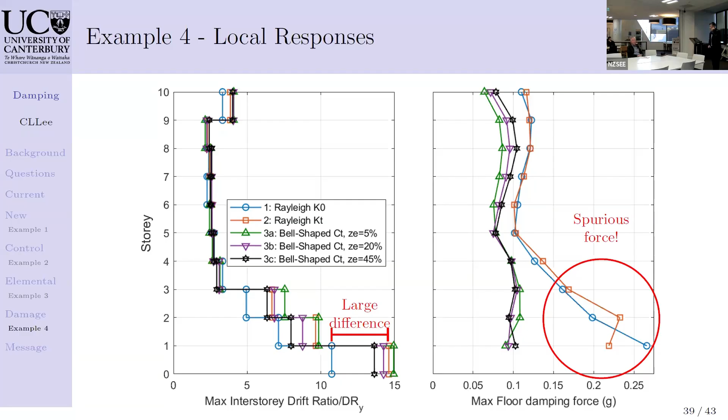Okay, what's my take-home message? Thanks for waiting until now. You might wonder, what's my take-home message? I think Rayleigh damping C, whether proportional to initial or tangent stiffness,

they result in unreasonably high damping forces. It doesn't matter whether you use tangent proportional. People have been talking about using tangent proportional, thinking that it could reduce it. Some say that it even reduces too much, right? I think Professor John Hall will say it's too much. But I think no, it actually still results in unreasonably high damping force.

And I don't think it's suitable for structures with softening response, because it would induce negative damping if you don't check it. And definitely not suitable for hybrid structures with inhomogeneous damping. Definitely.

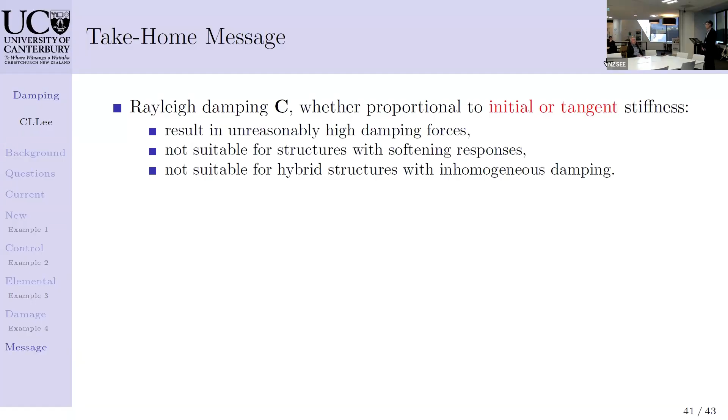And if you consider existing classical damping models like Caughey or modal damping, well, I don't think they are better. They could actually be computationally unfeasible, particularly Caughey. Some say I just use the iterative procedure, but I think it does not solve all the problems. Yes, it probably solves one in the time, but you still cannot control it in terms of how you update it.

The recently proposed bell-shaped damping model that I've been working on allows you to have any user-defined damping ratio for all modes. Up to you how you want to control it. Definitely no spurious damping forces, no strange large damping force. Definitely ensure positive damping during softening response.

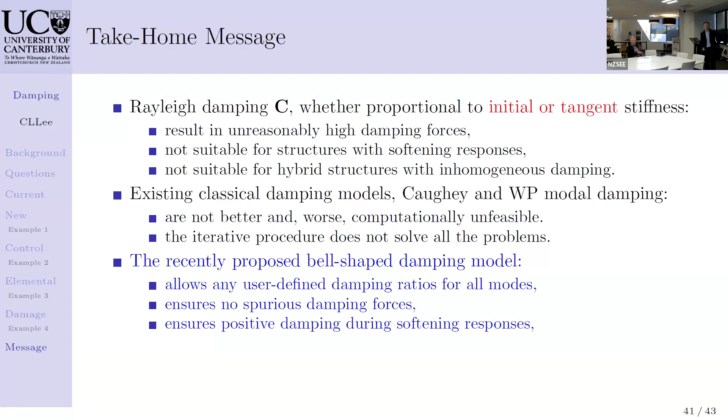You don't gain energy, always dissipate energy. And it's suitable for hybrid structures with inhomogeneous elemental damping. You can now talk about 5% for superstructure, 10% for basement structures. And it will give you good results.

And my dream is beyond that. I can even control such a damping ratio, can be calibrated against measured data, and can be a function of damage state. Can be amplitude dependent, damage dependent. That's my dream.